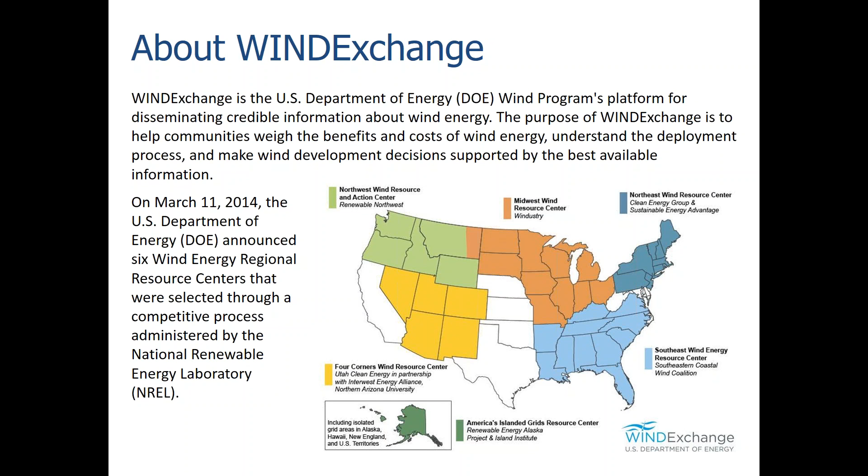The NWRC, as we call it, serves the Northeast. There are about 6 participating states, both for offshore wind and land-based wind, and we work with 2 project partners, Sustainable Energy Advantage and the Maine Ocean and Wind Industry Initiative, to share information about the offshore wind and land-based wind opportunities in the U.S. In addition, we host a resource library which has peer-reviewed credible studies and analyses on wind issues, and we also host the Offshore Wind Hub, which is a resource of legislative documents, reports, and other information related to offshore wind, and that's all organized by state and at the federal level as well.

So, very excited that today we will be getting a project introduction and a project update on the Icebreaker project, which is being developed by LEEDCo in partnership with Universal Foundation, and we'll learn more about this partnership and the development today. I will introduce today's speakers before their presentations.

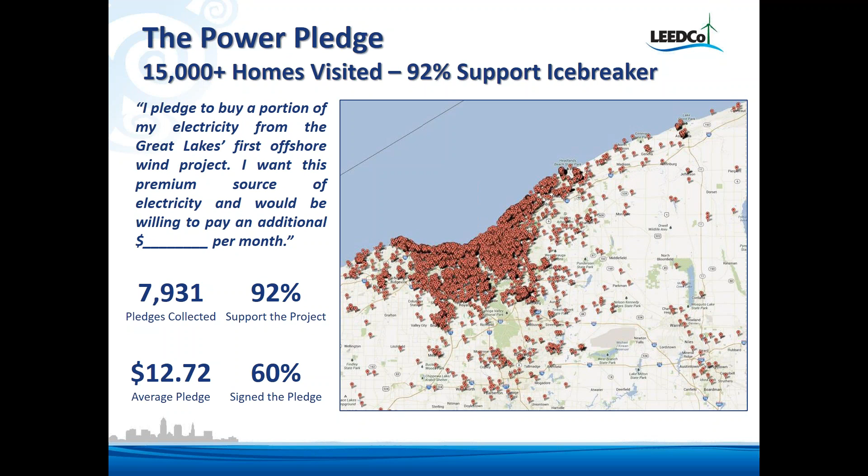I guess we should talk about - for those of you who are familiar with the project, this will make sense to you, if you're not, it'll be the first time you see it - but the project has actually been moved about 10 different times over the years for a variety of reasons. The latest was that we moved it a little farther out based on our Geotechnical Campaign, and then also moving out of an area that the Ohio Department of Natural Resources considered sensitive in terms of fisheries.

We completed a geotechnical campaign last summer, and the way I like to describe it is in 2013 we went out with a magnifying glass, and in 2015 we went out with a microscope and really looked at very detailed aspects of the soil. We adopted a new foundation, which Christian will talk about. We both have different ways of describing it - I call it quiet and gentle, and he can explain that.

We have PPA for 65% of our output, where our PJM interconnection is complete. Fred Olsen Companies, which Christian will talk a little more about, is actually a group of independent companies owned by a corporation and a family, and they've been in the renewables game since the 90s - about a 170-year-old company, 160, and very passionate about the environment and the future and doing the right things. And then we commissioned our aquatic species studies with Limnotech, and they will be out next week starting to deploy the sensors and collect the data for the Ohio Department of Natural Resources and U.S. Fish and Wildlife.

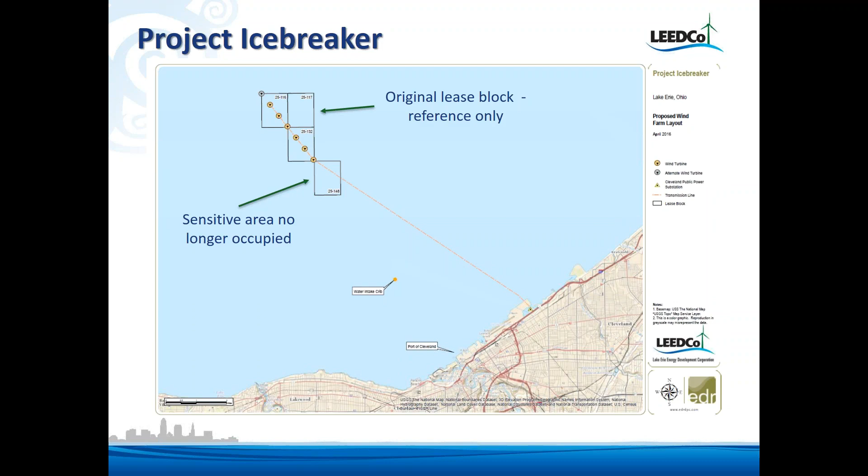This is one of our little drones that we had flying, showing you the geotechnical campaign from last summer, giving you an idea of what it looks like when you do it all at once. As you can see, we went to all 7 sites.

The CPT is a cone penetration test, basically a pressure probe that goes into the soil and measures resistance. And then, of course, the boreholes and superficial samples - we wound up doing 272 lab tests, so pretty robust. That data is what we use to design the foundation.

As you can see, like a lot of things we do, we had many partners here from the state as well as private contractors, and it was a pretty amazing campaign to get this done. It took a little less than 2 weeks, and believe it or not, in those 2 weeks we were only shut down 1 day for weather, which is pretty amazing for Lake Erie.

I mentioned PJM. We went through that process, finished it last July. No system impacts, no system upgrades, and we're good to go with a wholesale market participation agreement.

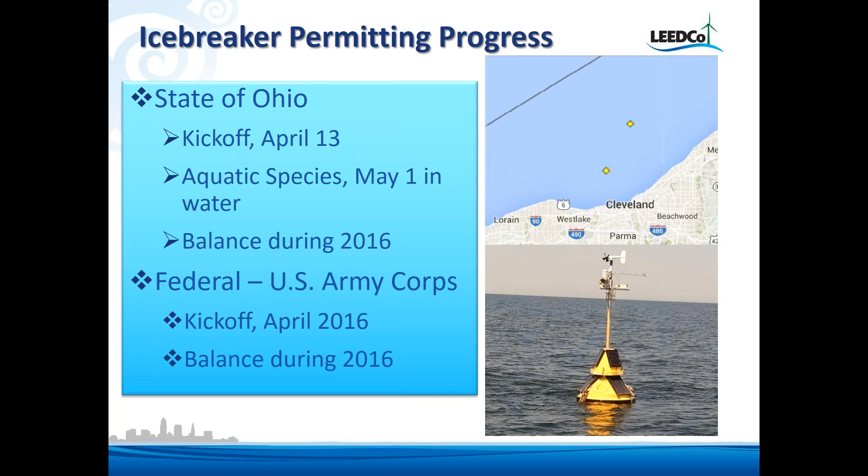It says here we kicked off with the Army Corps in April. Actually, it's going to be in a couple of weeks. We've had a few discussions just trying to keep the Army Corps up to speed on what we're doing in Ohio, and then we'll follow through with that for the rest of the year.

One of the things about LEEDCo that is quite different than any other developer in the U.S. is that rather than having all of our development assets within the company, we're a very small group. One time we had as many as 5 people, and so our method was to go and partner with the people who either locally know how to get this done or have the experience in the world to get it done. And so from an installation standpoint, we partner with Fred. Olsen Windcarrier.

They are the leading offshore wind turbine installation company, and believe it or not, they have taken a process that in some cases has taken up to 2 or 3 weeks to put up a wind turbine, and they've put one up in 11 hours. So they don't all go that well, but that's the kind of experience we need here.

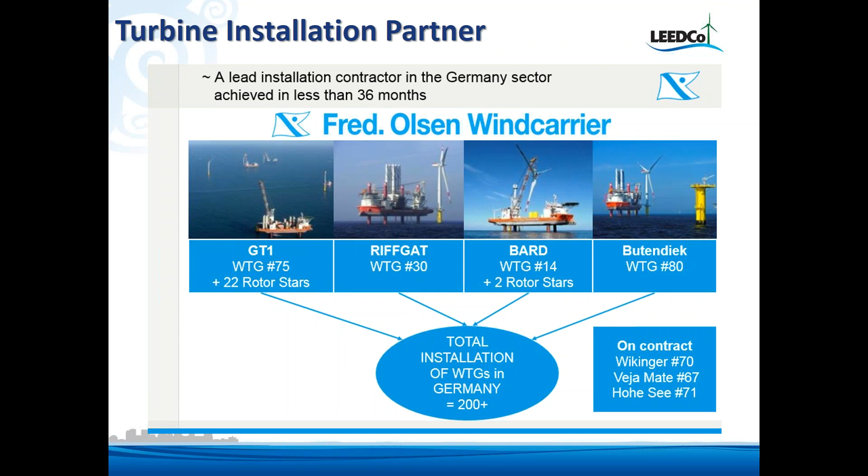And as a point of interest, the Block Island wind farm is also going to be using Fred Olsen, but they were our best friends first. In any case, we wanted to partner with people who really know how to get this done and have been out on the water.

The next thing is talk a little bit about the foundation, and then I'll turn it over to Christian. We're using what's called the mono bucket, and it's basically a large can on the bottom with a monopile on top. And the can is, when you put it, you take this foundation, you set it on the seabed, you evacuate the water, and it sucks itself down into the soil. And then it basically captures that amount of soil and uses that as the mechanism for providing the support.

In our particular case, it's actually capturing about 3,000 tons of soil. So once it's in place, it acts like a gravity foundation. So it's a pretty interesting product. We spent a long time evaluating this.

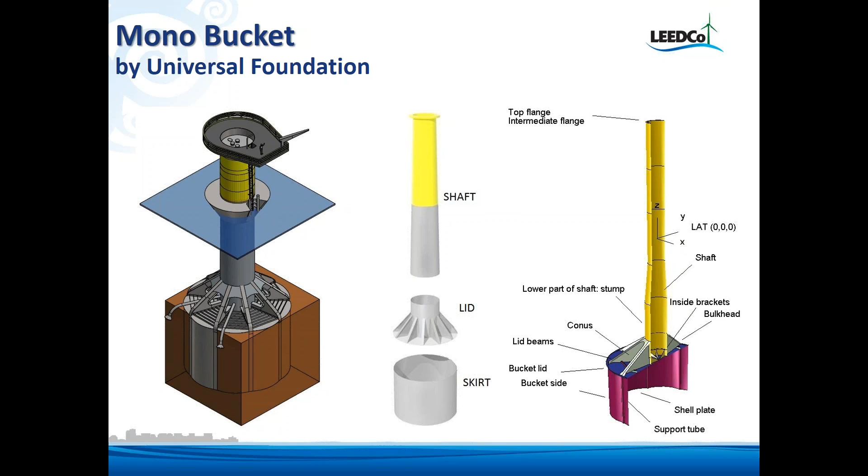We actually looked at every foundation type out there. We looked at a jacket. We looked at a gravity base, a monopile, a circular cell, which is sheet piling filled with concrete, and eventually, over the last several years, we've decided that this by far is the best solution for us, and also other places. Christian will have a nice little video, but as you can see during installation, it's very fish-friendly.

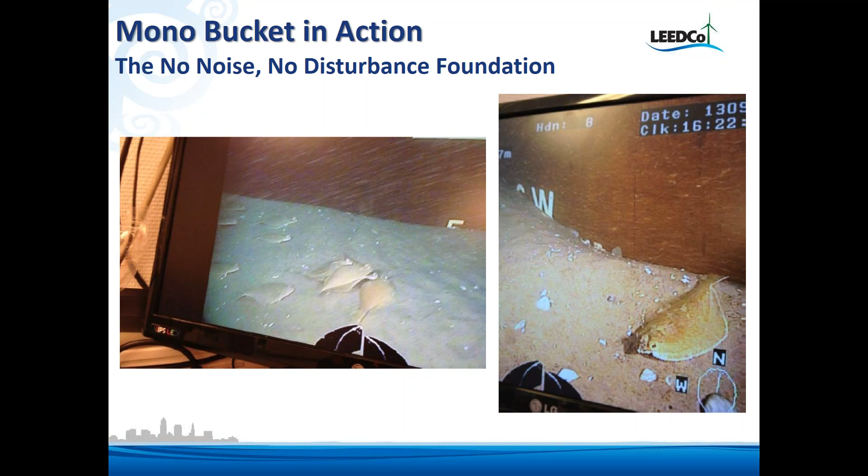And to me, what's amazing is as it's sinking into the ground, there's no seabed disturbance. So I think that from an environmental point of view, that's a very nice benefit from this foundation.

And just to finish up here, we also did a study under the Department of Energy where we looked at the mono bucket, and we compared that to the monopile and the jacket for the East Coast. Essentially, if you look at the areas, there's kind of 2 areas in the sense of wind regime as well as water depth. The Virginia, Maryland, New Jersey area is give or take around 25 meters, and then the Rhode Island, Massachusetts area can be on the order of 50 meters.

So the net of this is that in almost all cases, the mono bucket is the lowest cost foundation, in some cases very significantly, compared to the alternatives. When you get into pretty shallow water with a smaller turbine, it really depends on the exact soil conditions. It's pretty comparable to a monopile, but it gives you an idea what's going on.

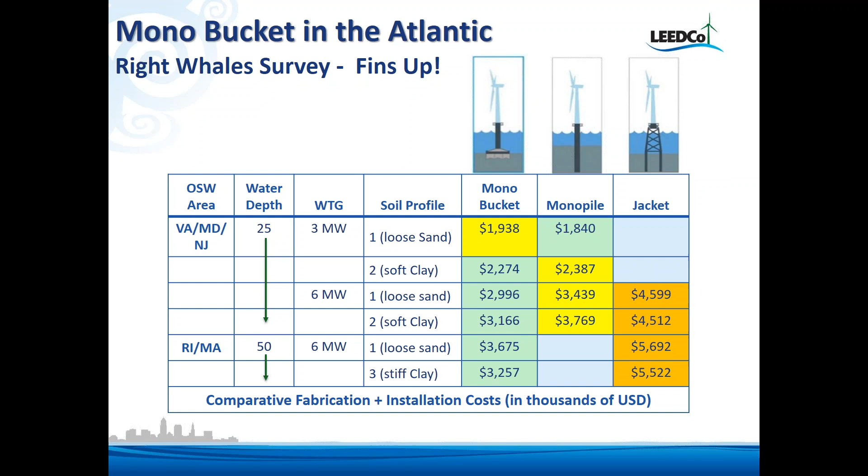We also did a survey of all the right whales up there. They all put their fins up and said monobucket is the way to go, no noise, so we were really pleased with that.

So Fred Olsen in offshore wind or in renewable energy, it's basically 1,500 employees in renewable energy.

The upper left corner is our onshore renewable development department with a capacity of almost 500 megawatts installed in Europe. We have Fred Olsen Windcarrier, as Laurie just touched upon, with 2 massive jack-up vessels, mostly suitable or dedicated to turbine installation, so offshore wind turbines. We also control service boats, and with these we take our operations and maintenance teams offshore, and that is done in the company Global Wind Service.

One of our distant cousins is Harland and Wolff, the company who actually built the Titanic, and as they say, it was fine when it left the yard. Mr. Fred Olsen also controls that yard, so we have the luxury of being able to manufacture our own foundations in Europe.

Mr. Fred Olsen himself is a man of 87 years old. He's an entrepreneur by heart. When he steps into something, he wants to make a difference. And when he decided to step into offshore wind, it was to make a difference in terms of reducing levelized cost of energy. So he has been dedicated to that ever since.

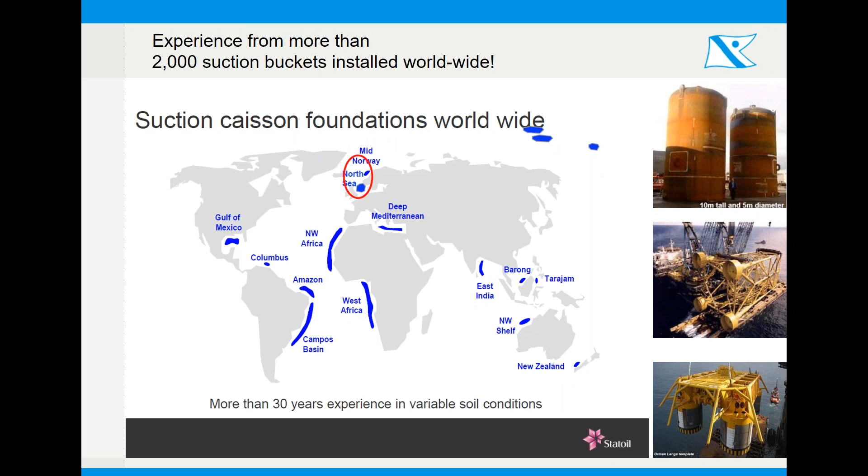Our foundation, the monobucket, basically builds on suction bucket technology. Not many suction buckets have been installed in offshore wind in Europe, but in oil and gas, more than 2,000 suction buckets have been installed worldwide. One of the largest man-made structures in the world, the Troll A platform, is actually supported by suction buckets, built and deployed out of Norway. So the experience is there, and that is what we are trying to capture and transfer into offshore wind.

So how does it work? As Laurie also said, it works like a tin can, where you basically evacuate air or water from inside the foundation. We attach a bespoke piece of equipment called a suction pump unit to the top of the structure, lower the foundation to the seabed, and dead weight and gravity ensure that we self-penetrate to close the cavity of the tin can.

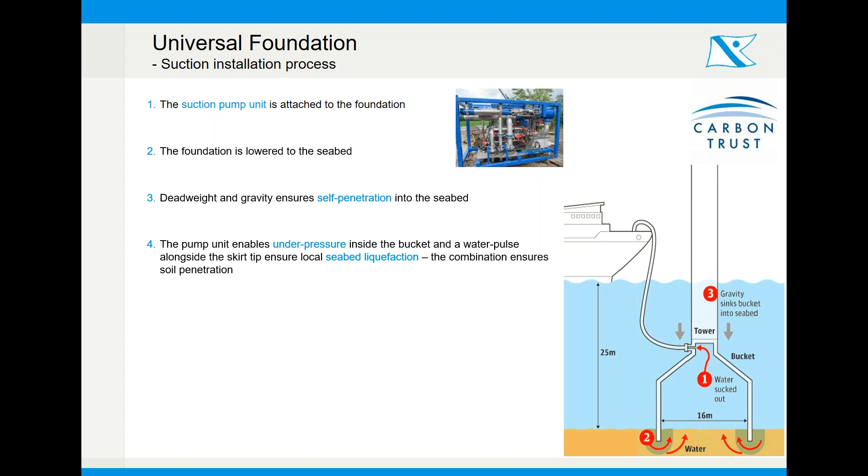The pump unit enables us to build under pressure, and then we work with the water pulse along the skirt tip of the foundation to basically liquefy the seabed. The combination of the two ensures that we are able to penetrate into the soil and capture the 3,000 tons of soil, as Laurie also mentions.

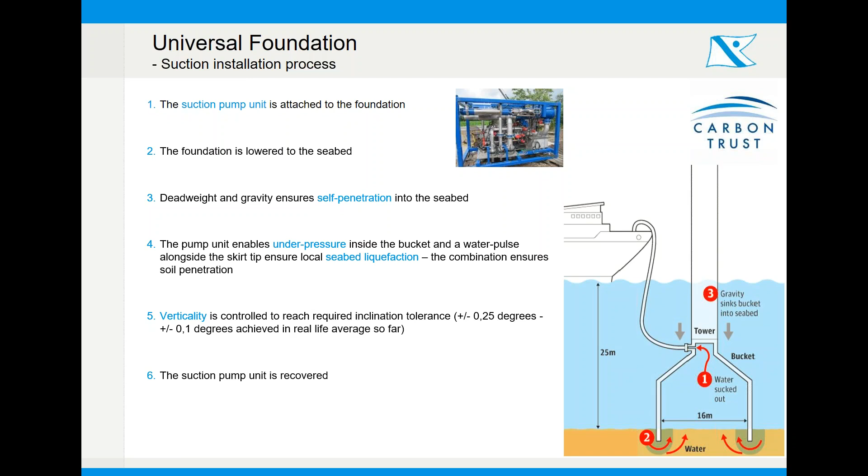We have a number of quite unique tools that enable us to control verticality, so we ensure that the turbine, which is ultimately put on top, is perfectly aligned and ready to produce power. Then we remove the suction pump unit, deploy that for the next site, and do it all over again on the second, third, and fourth foundation.

The track record in our company, as Val said, stretches back to around the millennium, where the first project was deployed with a 3 megawatt Vestas turbine in Frederikshavn. We also did a MetMast project at a site in Denmark, Horns Rev, where the unique part was a floating installation concept.

Dogger Bank in 2013 was the first project seeing Fred Olsen's involvement in the company, with the deployment of 2 MetMasts offshore at the harshest working environment in the North Sea. We were so lucky that the first winter we were hit by the 50-year design wave, a monster of around 65 feet, that hit the foundation on a site with only 25 meters of water. That was a monster.

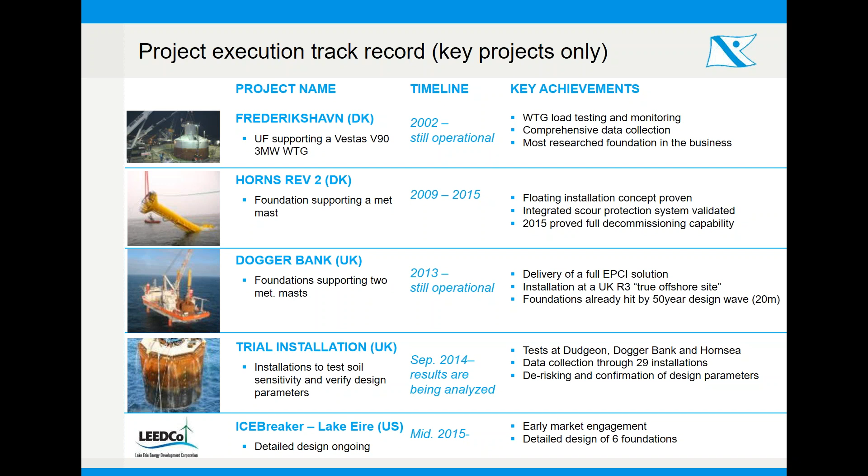In 2014 we completed trial installations at 3 major sites in Europe, a program set up to de-risk the foundation. This also benefited the Lake Erie project by demonstrating that we are able to push the envelope much further than we originally believed was possible. We are also proud to be part of the Icebreaker project, and hope to see that as one of the first major offshore wind farms in the US.

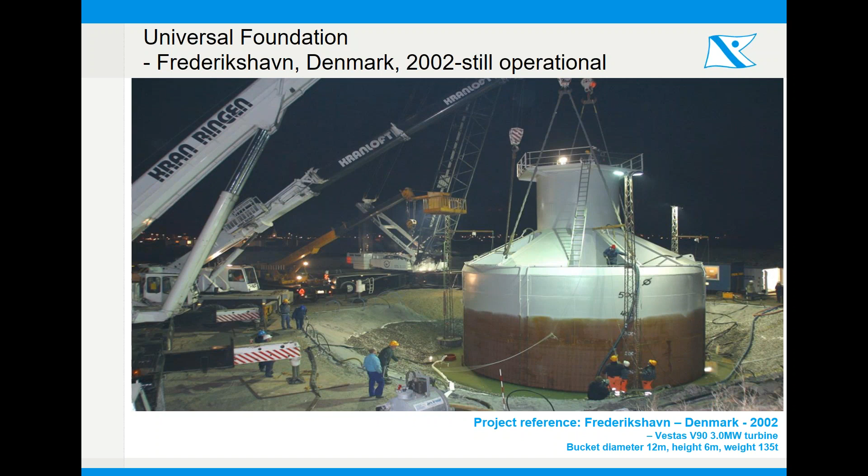I have included some pictures. This is from our Frederikshavn project with the Vestas V90 3 megawatt turbine. It was a foundation of 135 tons, a bucket of 12 meters in diameter and a height of 6 meters, and that is still in operation. The turbine on top, the V90, is a prototype turbine from Vestas, meaning it's one of the most tested turbines in the industry, which has also meant a lot of monitoring on the effect on the foundation. We are proud to see it still in operation.

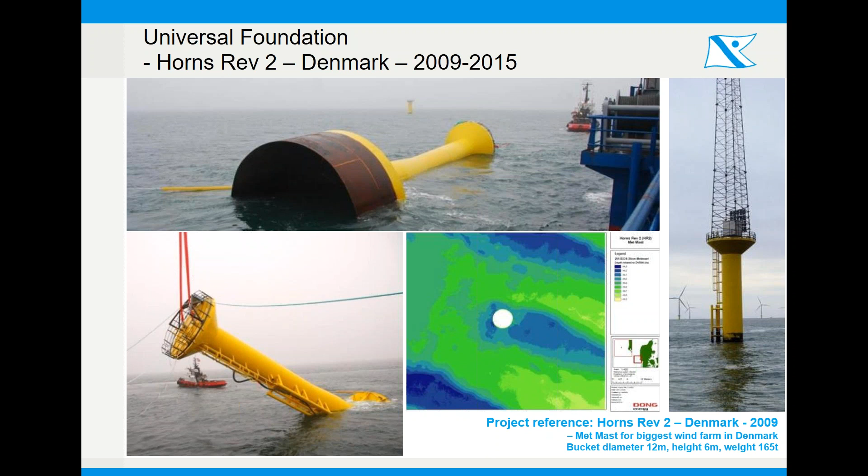The metmast for the Danish project Horns Rev 2 was deployed in 2009. It was the first metmast with a monobucket on top, part of one of the world's largest wind farms in Denmark. The unique part here is that the foundation was floated out, so instead of relying on a very large vessel, we only used a small crane to upend the foundation and then do the final installation.

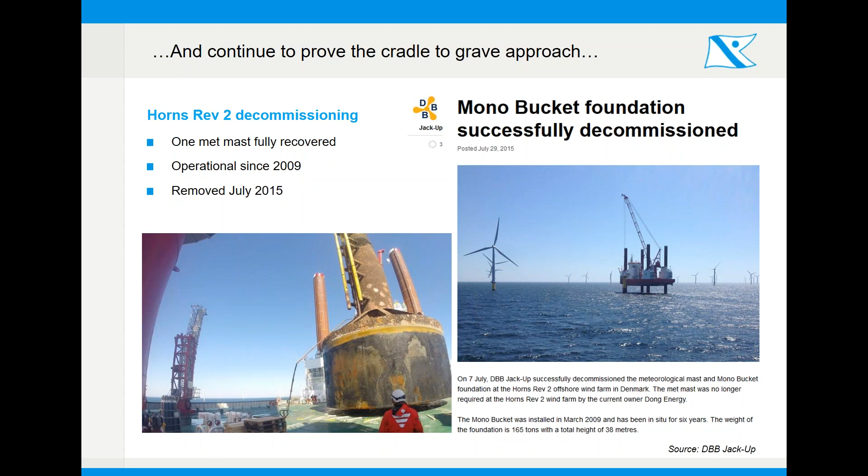Another unique feature of this project is that we were able to fully decommission the foundation. How that works is you reverse the process: instead of sucking into the can, you put pressure in, and the foundation comes out. This means we are able to 100% remove the foundation after being in effect with the turbine for 20-25 years, leaving the seabed completely as it was when we deployed it. That is one of the major benefits of suction buckets in general.

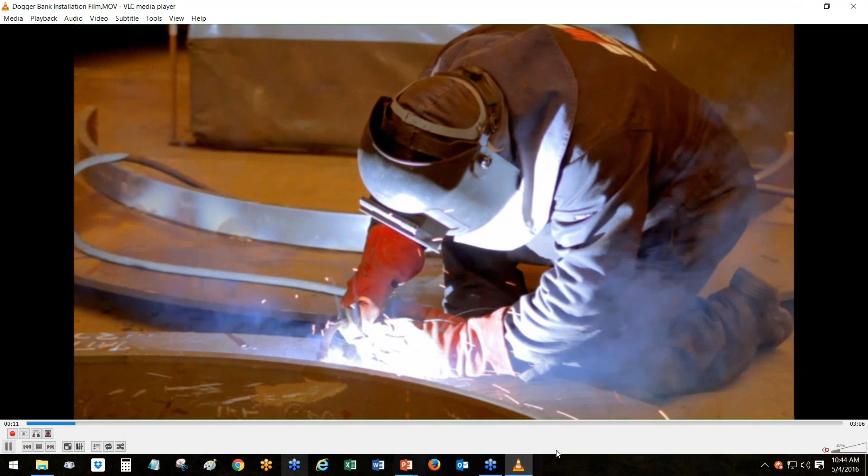Then we come to the first project seeing the Fred Olsen involvement. I'd like to show a video - briefly, the foundation here is 350 tons, 15 meters in diameter and 7.5 meters in height. We do have a little lag on the video, but this is basically from the manufacturing hall at Harland and Wolff in Northern Ireland.

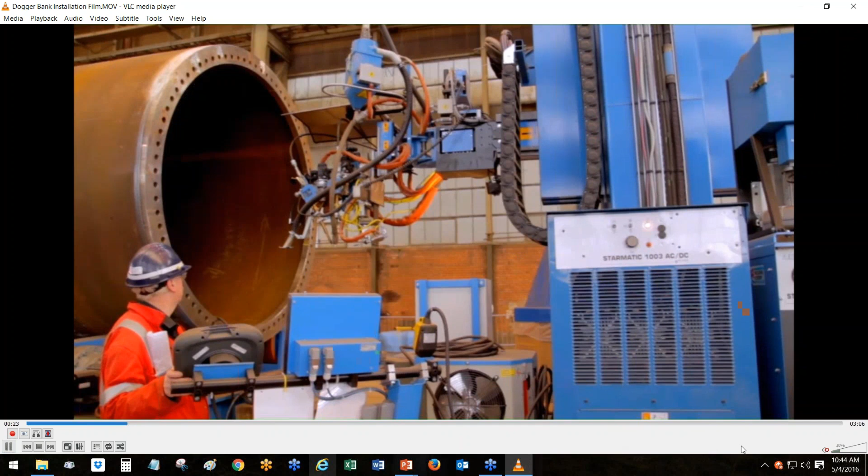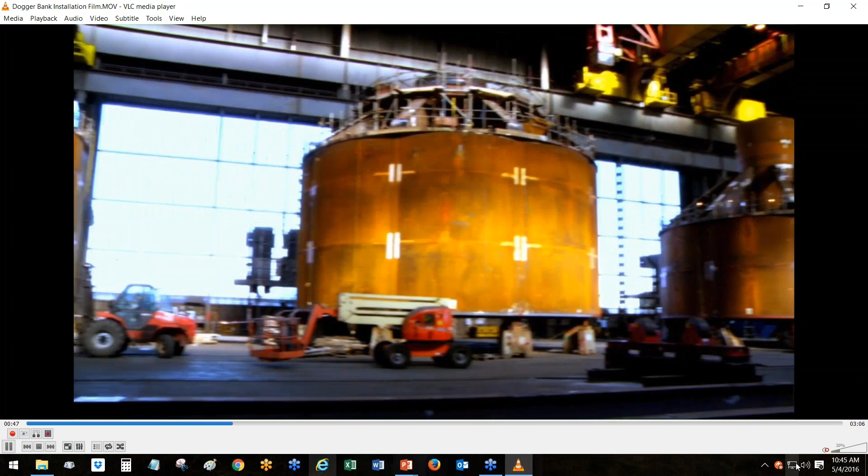Where the foundation was manufactured and prepared for loadout - and again, this is the same yard that did the Titanic. We did this with greater success because the foundations are still standing. As you can see, it's some quite big structures within the manufacturing hall here. The lower part is attached to a lid, and on top of that a shaft is mounted.

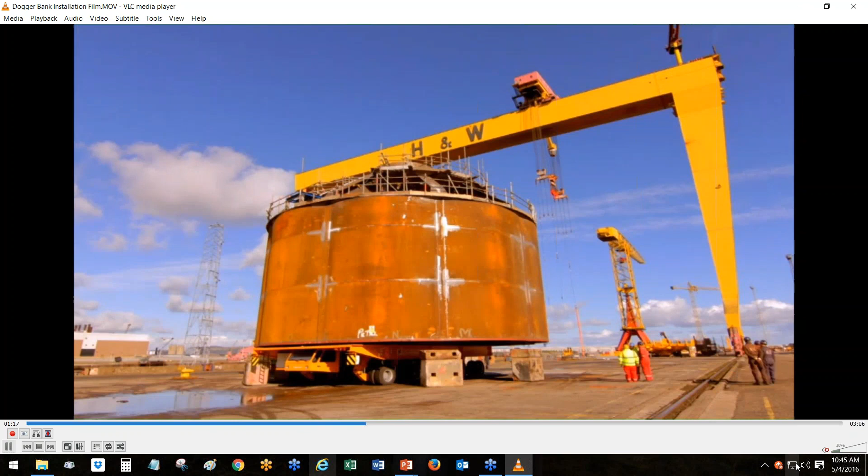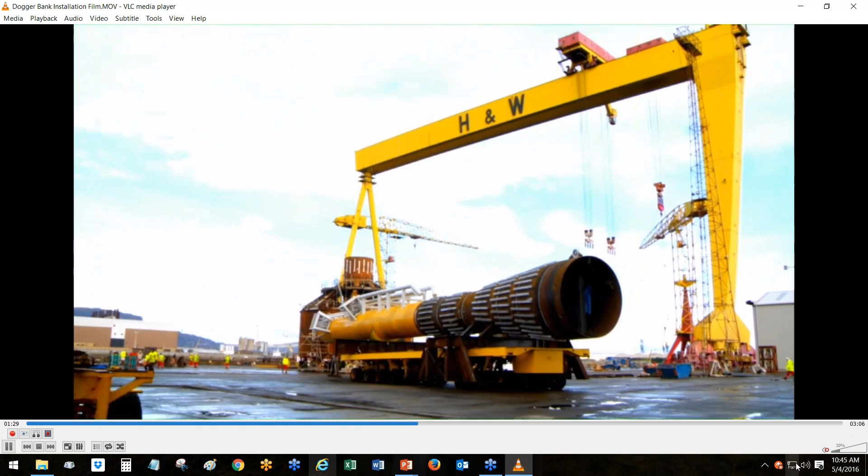We use SPMTs, self-propelled modular transporters, to transport the foundations out to the quayside, where the Fred Olsen Tern vessel was waiting for pickup and loadout, on a beautiful day in Belfast. This is the lower suction part of the foundation, and here we see the shaft section, which was then attached afterwards to the main structure. This was done using one of the big gantry cranes at Harland and Wolff.

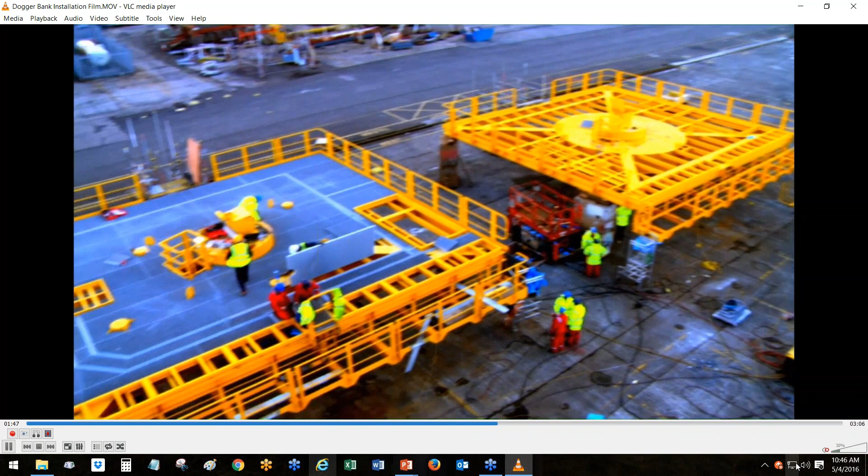Shortly you'll see we have a vessel lying next to the foundation - here we go, the orange vessel, the Brave Tern, where we loaded the two structures on board and then set out on a beautiful day. This is a snapshot of how the installation actually worked: it was taken off the vessel, lowered into the seabed, and after 7 hours the foundation was completely installed with a topside metmast.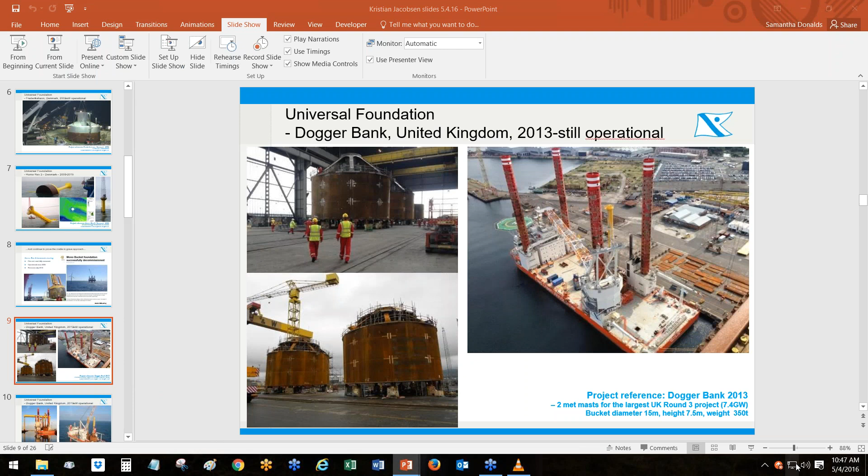And now I might have to, yeah, there we go.

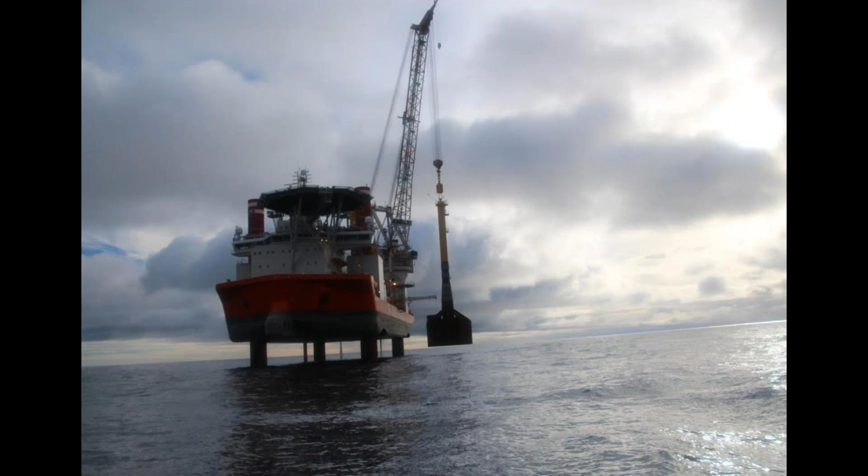A beautiful picture from the North Sea with the loadout. Here we have the flounders being undisturbed during installation. And this is pictures from our trial installation. The result was that we ensured 29 installations in a record-breaking 24 days. That has resulted in a very unique soil database.

Then we met the nice guys from LEEDCo, and I am proud to have been part of the process to secure the first commercial project for Universal Foundation. I am excited to see that project go online in a couple of years.

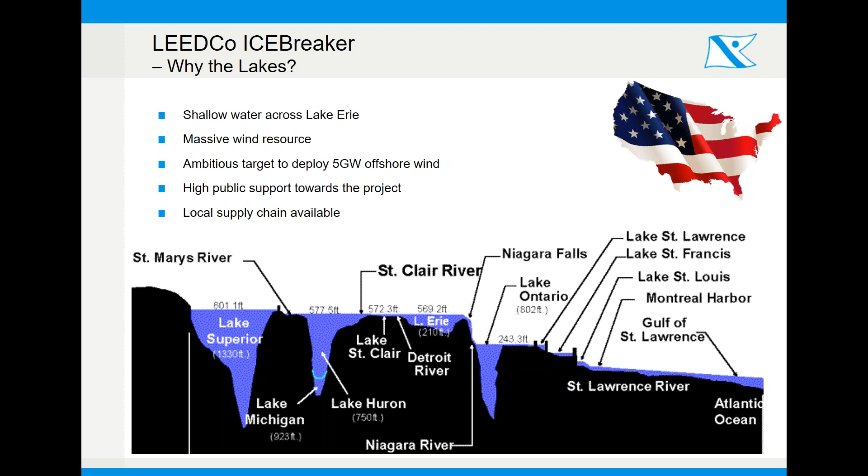So why the lakes? If you look at the lakes across the states, Lake Erie is shallow water and has a massive wind resource. We have an ambitious target of 5 gigawatts of offshore wind deployment in the area. High public support is a valuable asset for any project, and we actually have a local supply chain available and ready to support the process. Again, it is a perfect site to deploy wind in general.

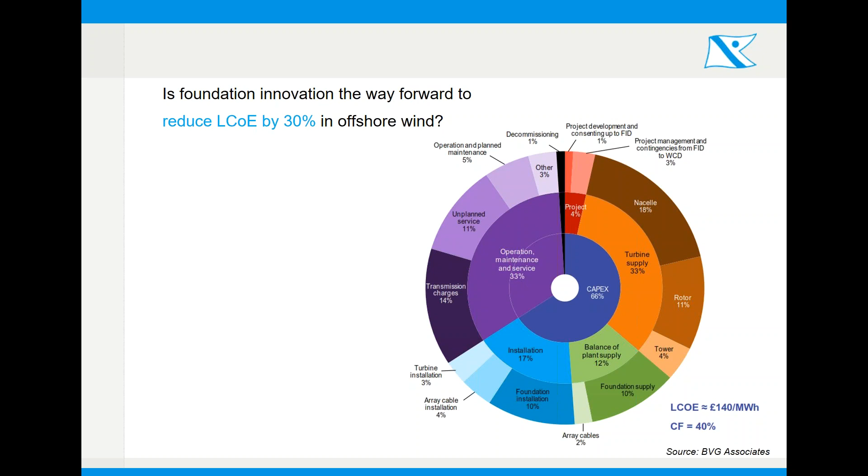So why did the team behind LEEDCo focus on the foundation? Based on this split, the foundation basically contributes to or amounts to 20% of the total levelized cost of energy. The turbine is around one-third of the levelized cost of energy, so the contribution coming from the foundation is massive.

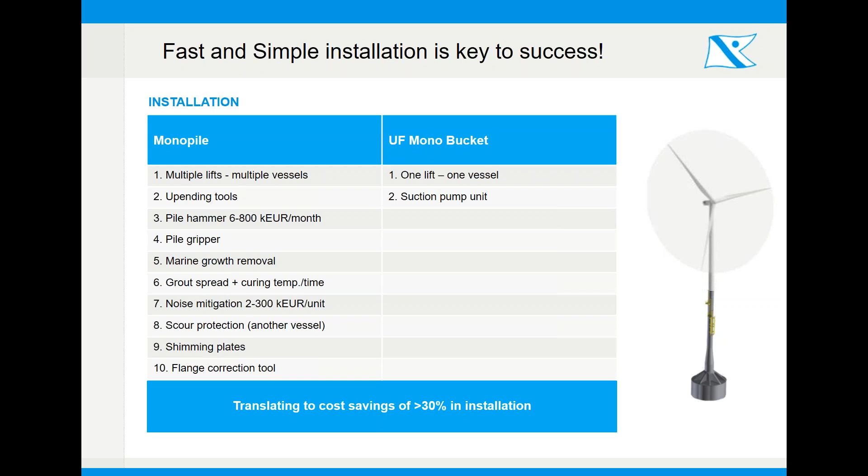Here we have just indicated a cost saving in the area of 30%, and that has been confirmed in the projects we have been participating in.

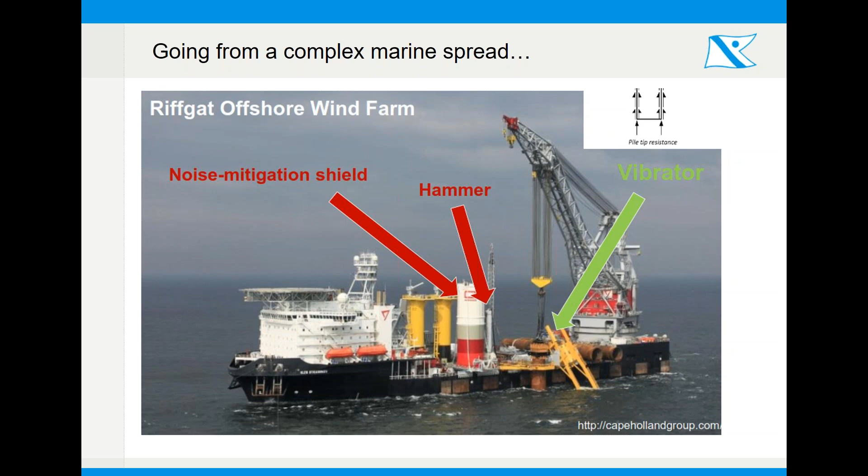This is a picture taken from a monopile project. You come out with noise mitigation shields, big hammers, vibrators, upending tools, flange correction tools. There's a lot of equipment on these big vessels. The vessel you see here has a day rate of around $300,000 US, so it is expensive equipment that you come out with.

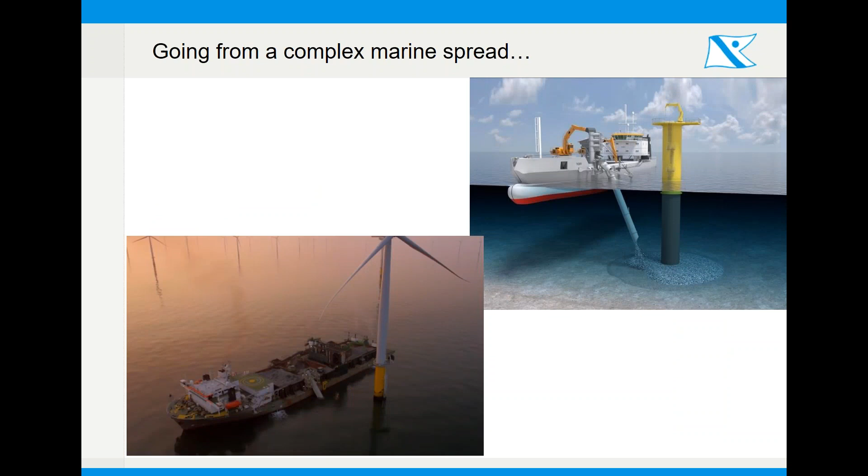The deck on such a vessel is quite packed for monopile installation. You need to go out and scour-protect the foundation afterwards - that's another vessel that goes out to secure that. And then during installation, you have the noise problem, which is particularly big in Germany, and we also see that increasing as a problem in the States.

For the European utility client Vattenfall, one of their projects saw deployment of a number of noise mitigation systems. First they deployed what is called a big bubble curtain, then a double big bubble curtain, then a double big bubble curtain with a linear bubble curtain, then upped that with a triple big bubble curtain with a linear bubble curtain.

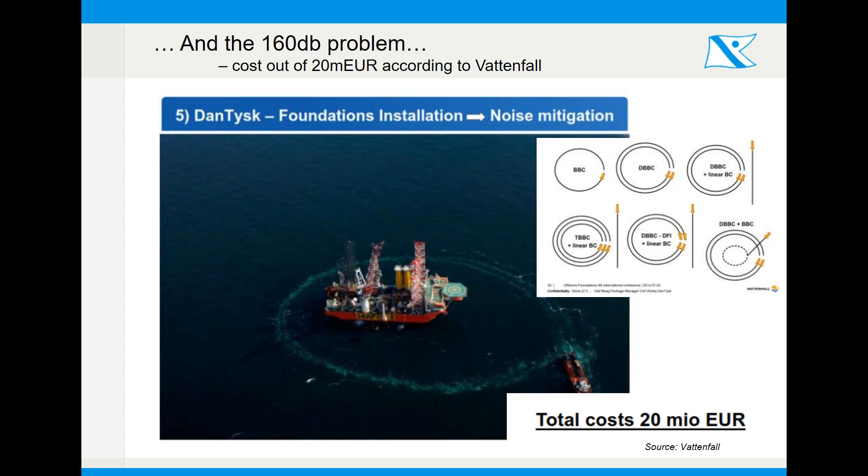It is a massive operation, and in total this translated into a cost for the project of 20 million euro, equivalent to around 23 million US dollars - that is 290,000 US dollars per foundation. So it is really expensive. The reason they are showing this number is because they are probably the best in the industry; other projects have seen much higher numbers to mitigate the problem of noise.

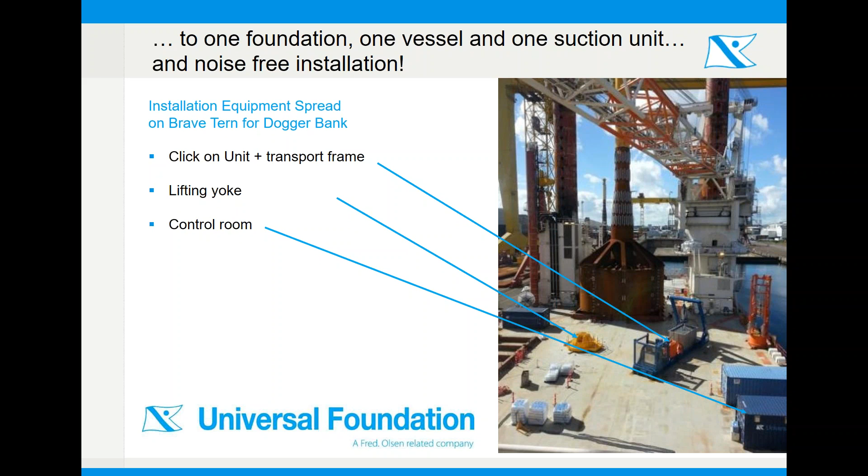Here we have a picture from offshore at Dogger Bank - nice pictures of 2 foundations standing ready for deployment with our Brave Tern vessel.

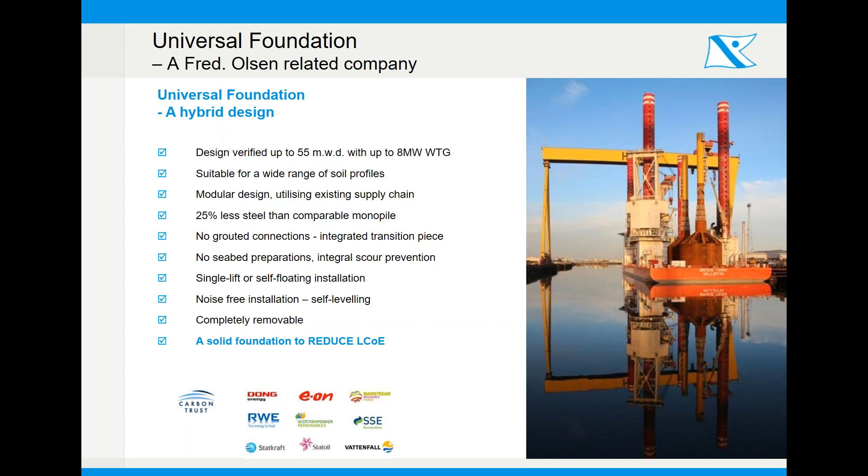The final slide is basically a summary of all the benefits. I'll leave it up to Val for the questioning now, but please look into the benefits. It all translates into reducing levelized cost of energy, and that is the reason for us being part of this industry - we need to bring the cost down to make offshore wind fully competitive with other energy types.

And finally, the offshore inhabitants are already convinced that it's a good solution. Luckily, we were also able to convince LEEDCo.

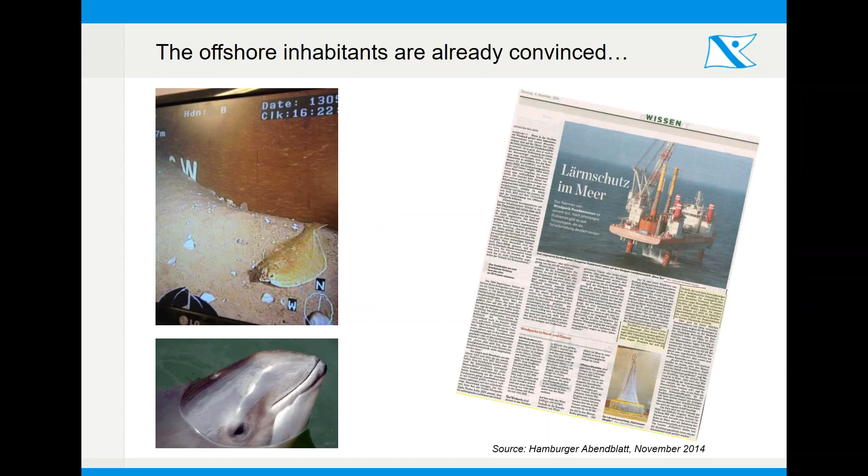Great, terrific presentations, thanks to you both. I'm going to quickly jump into the questions. We've gotten quite a few coming in. Feel free to keep submitting some, and I will try to get to as many as possible. So let me work backwards and start with some questions about the foundation.

Is the infrastructure in place to build and install the foundations for the Icebreaker project? Yeah, the answer is yes. Just to give you an idea, we recently went out to bid for the primary steel, and there were 5 manufacturers in the Great Lakes and 3 from the Gulf bidding on it. We have 6 out of 8 bids in, and the numbers are very competitive, and that includes the manufacturer and the transportation to site.

As a follow-up, if this project is successful, is there any chance that manufacturing could take place in Northeast Ohio, for example, for the foundations or turbines? Yeah, certainly on the foundations, one of the bidders was from Cleveland, and our goal is to bring as much of that as we can to the region. As far as the turbines go, I think it's the same old story anywhere in the world - until you get an industry, until you have enough turbines being deployed, you're just not going to see much manufacturing. Although we are hopeful that the towers for the turbines can be made in the Great Lakes region as well.